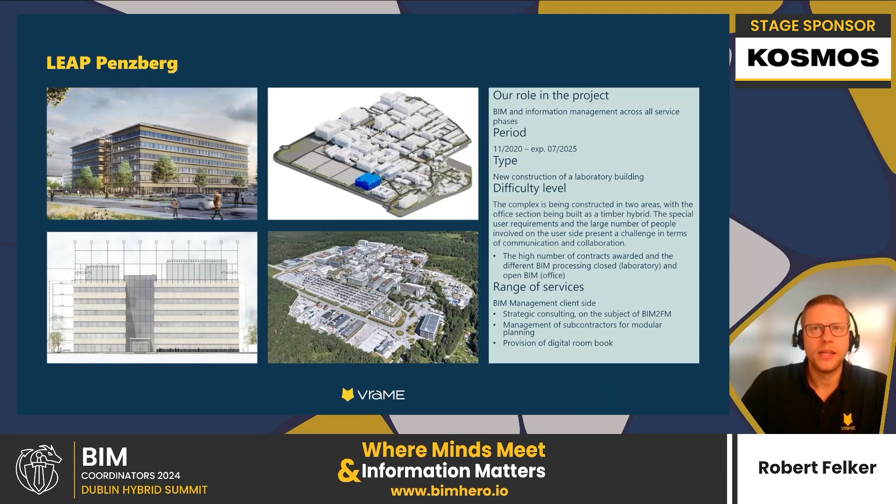The difficulty of the project was based on its structure, divided into two inside projects carried out by different work teams, each with different working methods, which we had to manage in terms of communication and collaboration with others. Let's take a look at how the project is structured and what the technical environment of the project is. So, what are the challenges?

We have a high number of stakeholders with different interests in the project. On the client side, we have the user stream and the site engineering, which provided the project to the user. In the laboratory part of the building, we have individual contracts with the planners and a high number of disciplines. The office side of the project is being constructed using a timber hybrid construction method and a specialized general contractor was sought for this proposal.

Each of these stakeholders had an individual working system with parallel project phases that overlapped and conflicted with each other, and many software that we have to make work together.

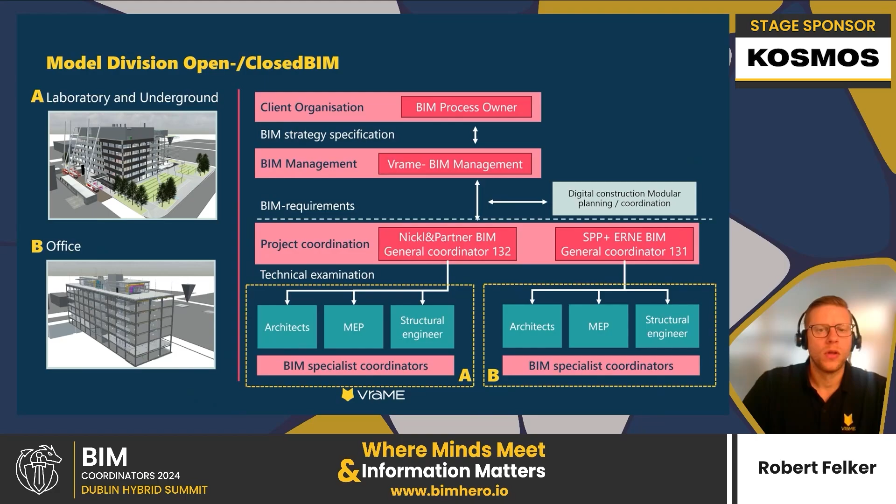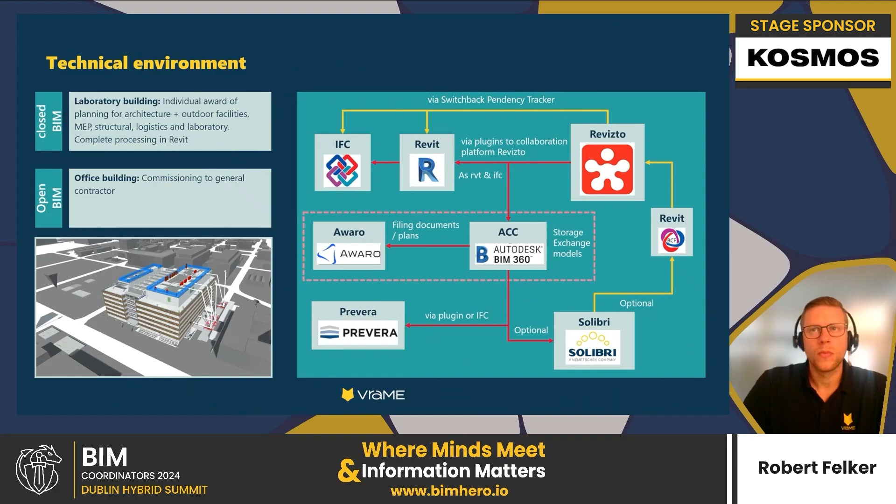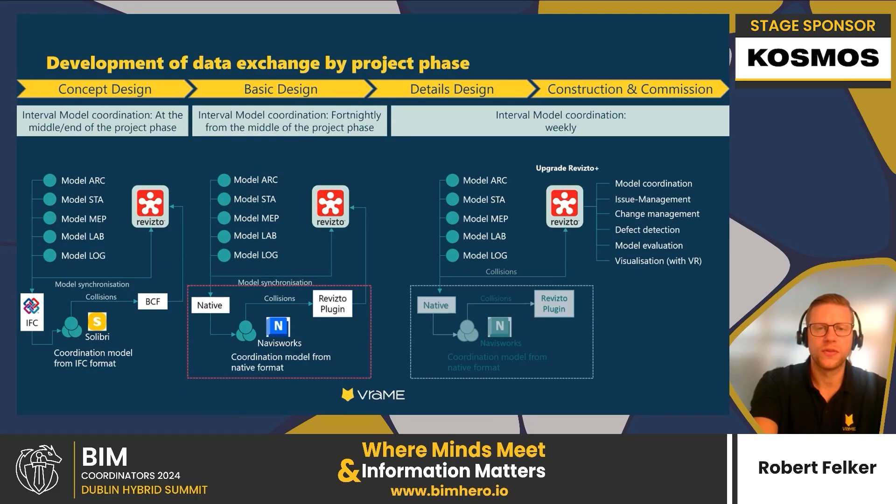So what use cases have we set up for communication and collaboration in Revizto? We have model coordination and quality assurance, structured issue management, change transmission and management, and comparison of models from detailed design and installation planning models, because we have overlapping phases, and model evaluation based on object information.

We have snagging or defect detection and documentation, so checking the deviations between model and construction site. We have the tracking process for opening voids, comparison for fire protection concepts in 2D with implementation of the models, what we will see later, and the user vote, facility management, and the safe, healthy, and environment aspects, which we have in the project.

The Revizto implementation. Okay, let's come to it. To manage the complexity of the project structure and the various applications involved, we have implemented Revizto. What we have done there is, at first, we have our complex collision matrix implemented in Revizto Plus.

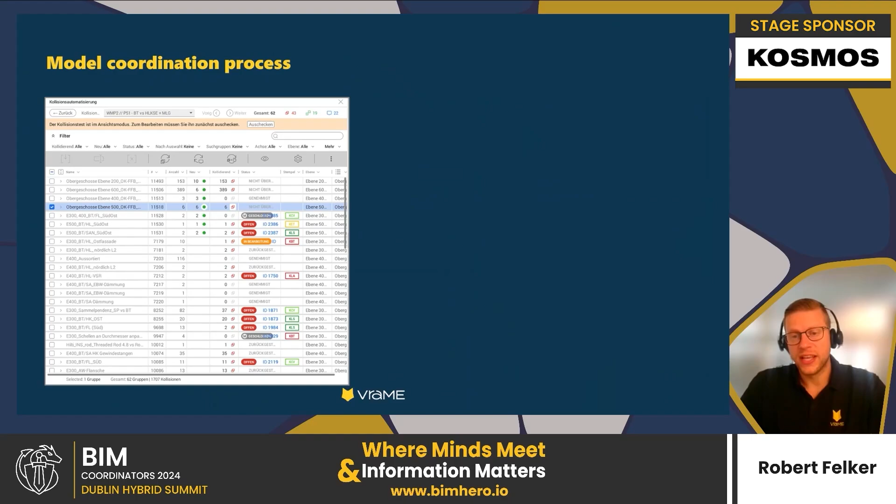Once the matrix is cleverly implemented in Revizto, further checks can be carried out extremely efficiently, including the automatic assignment of issues to the relevant parties. After each update of the review, you can quickly see how much has been processed and how many new issues have been added. Everyone has access to these collision detection results in Revizto.

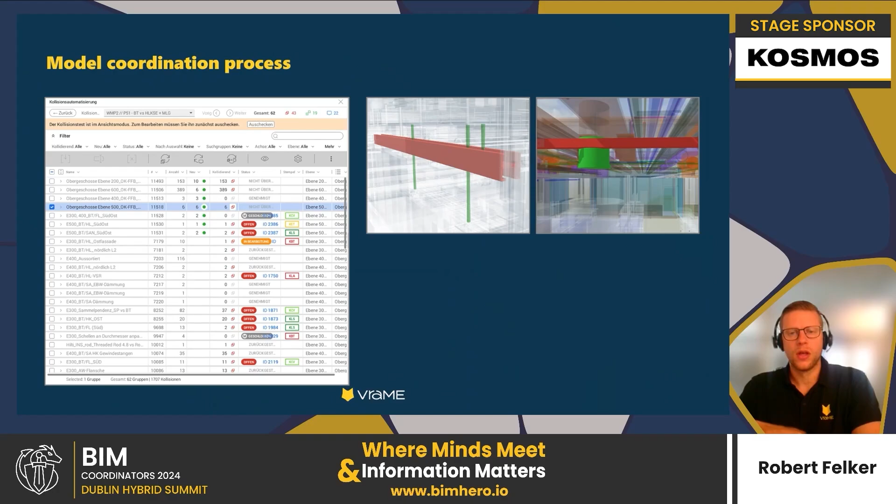Another important thing is that the editing of the rules can be restricted through permissions, so the manager can maintain this part of Revizto. Here are some examples of how the results are presented in it with the viewer.

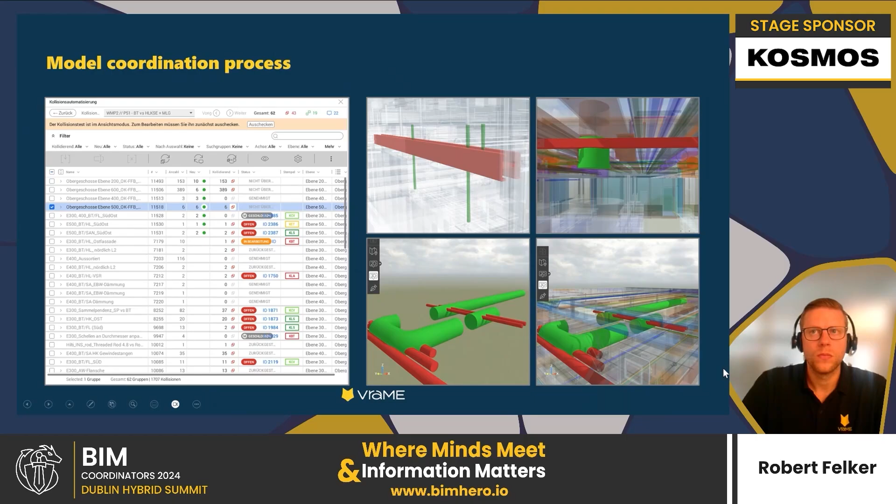After the clash detection has been performed, the results can automatically be generated as issues. In the issue tracker, issues can also be manually created, whether they arise from fly-through the model or during coordination meetings. This issue tracker allows us to manage and track all issues of the project using Revizto and its model viewer. After clicking on an issue, we can see an example of communication through BCF in the project, connected directly with the model loaded in the platform.

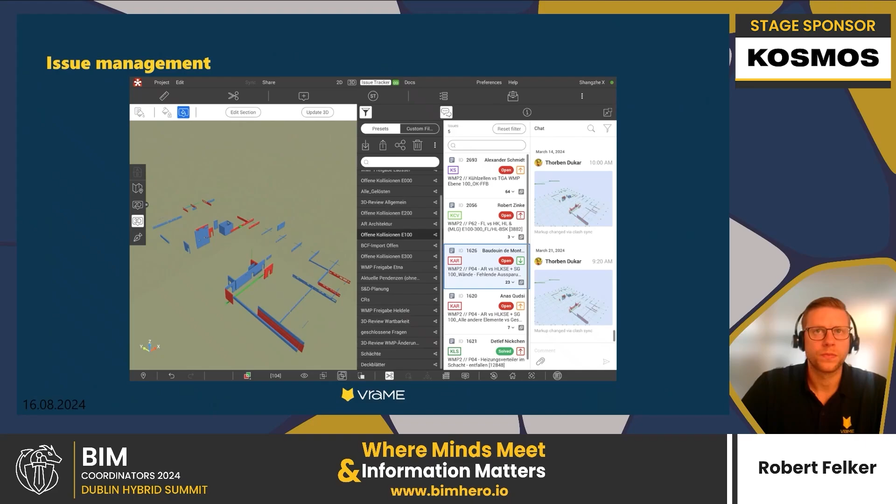An important process in this project was to track client-side changes introduced very late in the project. We have also implemented this in Revizto, as shown in the example here. Change orders or change requests are created also as an issue, and their status is recorded in the issue tracker. Only when changes have been incorporated into the model were they marked as completed.

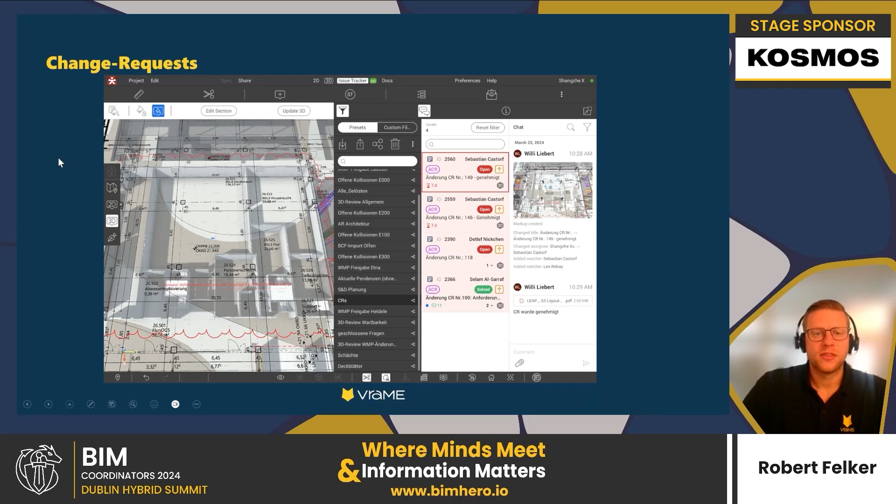Another aspect of the process is communicating changes resulting from the overlap of phases from detail design and construction, and commissioning with the contractors. We do this digitally and through the platform. It's much easier to understand what has changed, and the issues can be effectively tracked.

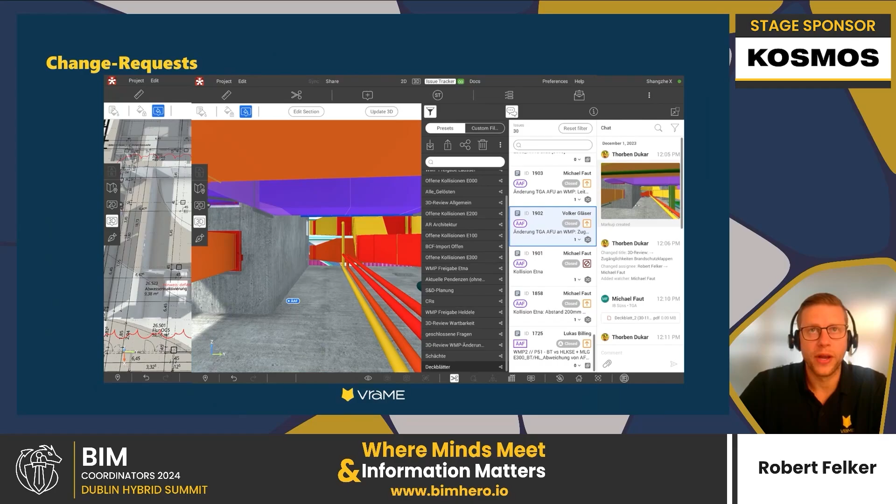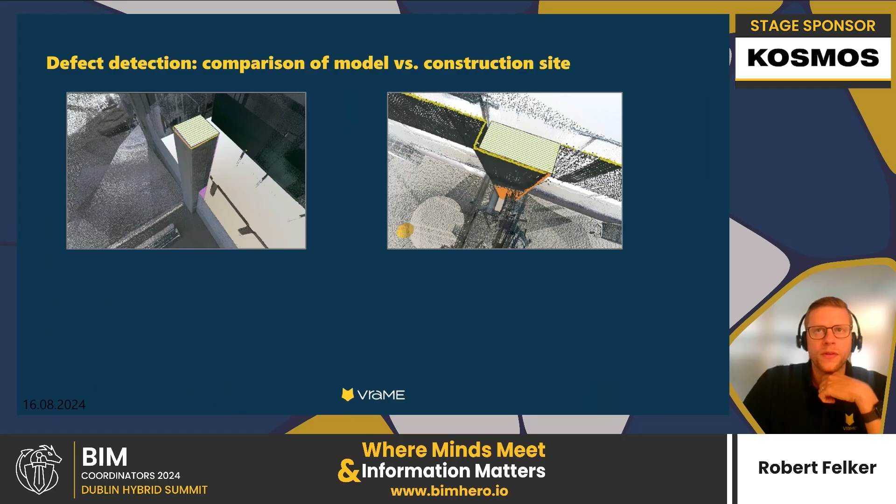Another topic implemented on the platform is comparing objects on site with the models. Deviations must be documented here, and the models have to be adjusted to get an as-built model at the end of the project. For the shell construction, this was done using point clouds, which were compared with the models. Deviations were created as issues and assigned to the relevant responsible modeler.

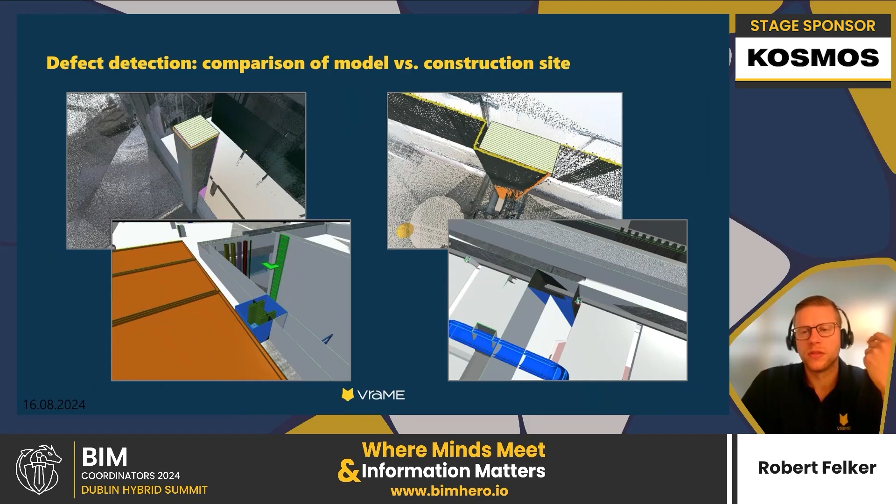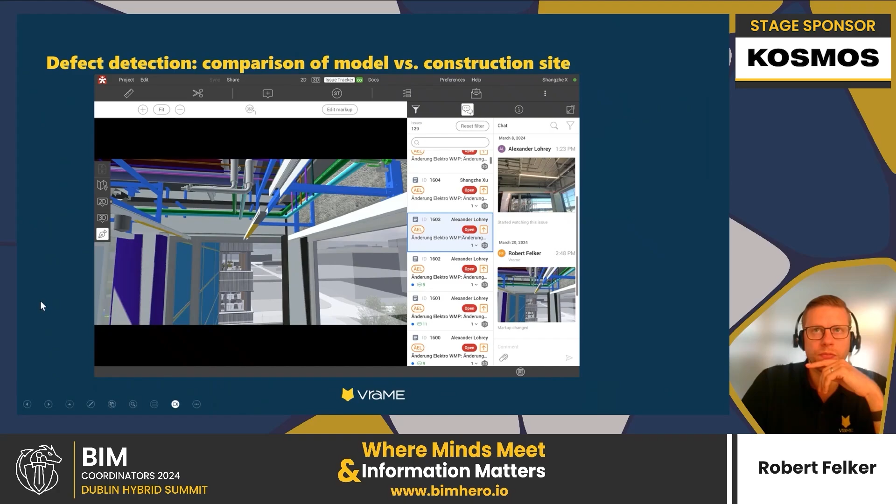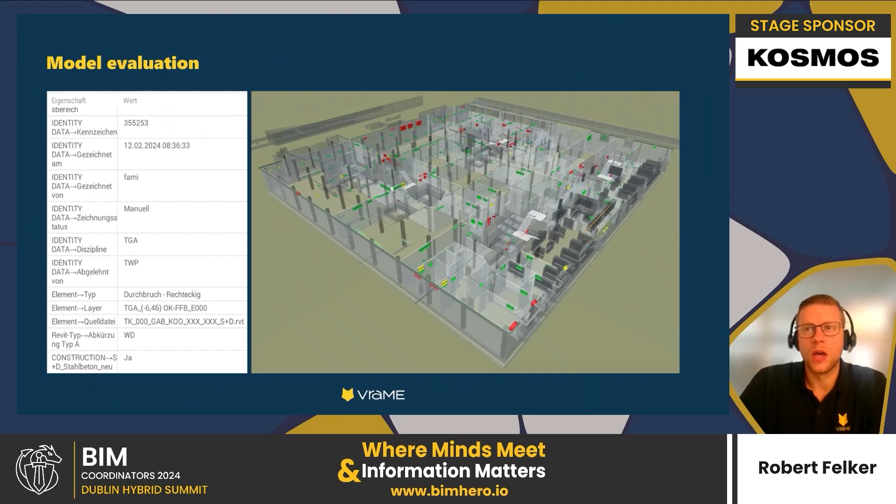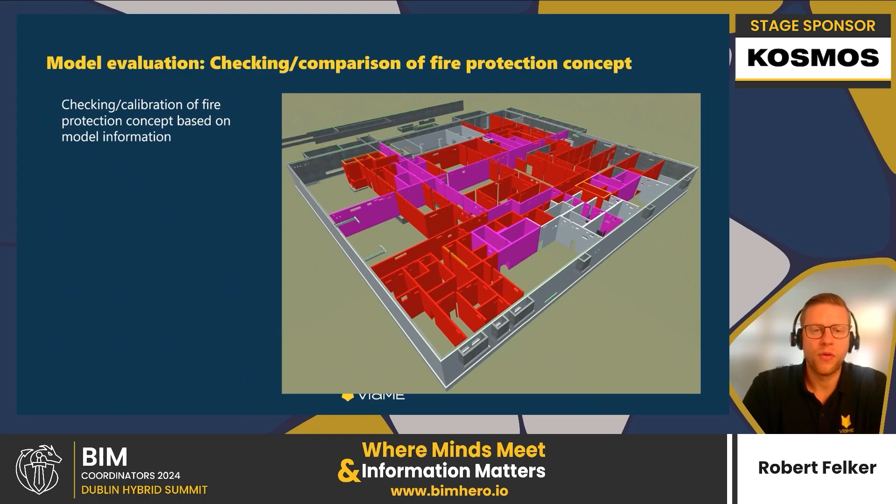Another functional analysis was to generate filters or visuals to analyze the attributes of different elements in terms of fire protection. In this project, we have a fire protection planner who does not create models, but only provides overview 2D plans. Therefore, we set up a process so that the architect transfers the information into their model.

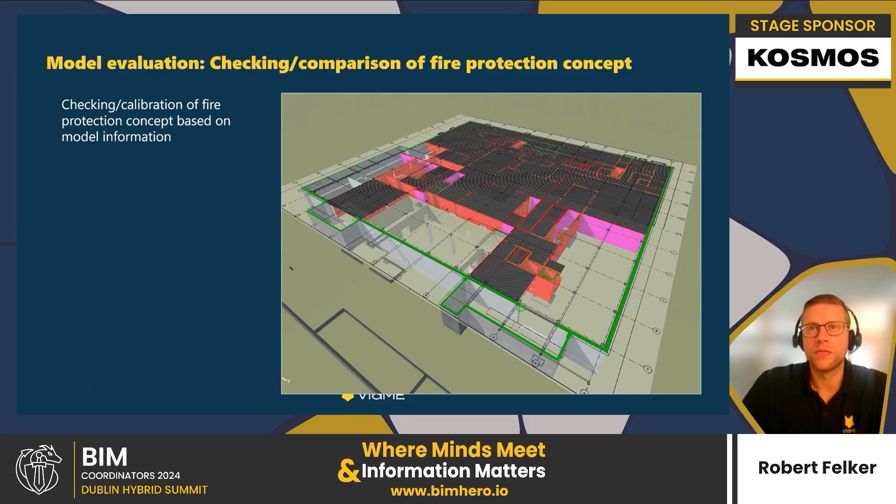You could imagine this process is prone to errors. So for quality checks, we color-coded the information in the architectural model and cross-checked it, like you can see here, with the 2D overviews provided by the fire protection planner. This also gave us great confidence during this process in the project.

In a laboratory project with even individual planners and separate contracts, the interface between laboratory planning and MEP is very important. To ensure that the requirements for laboratory equipment and the placement of connections work well, the interface between these two had to be coordinated based on the models in this case.

We discussed three different levels of implementation within the team. Level 1 is the purely geometric representation of the interface location using these small blue boxes, along with lists detailing which box contains which requirements. Level 2 has the geometrically placed boxes, but also with added parametric information within the boxes that include specific requirements. Level 3 is a bidirectional interface between the model and the equipment catalog of the laboratory setup.

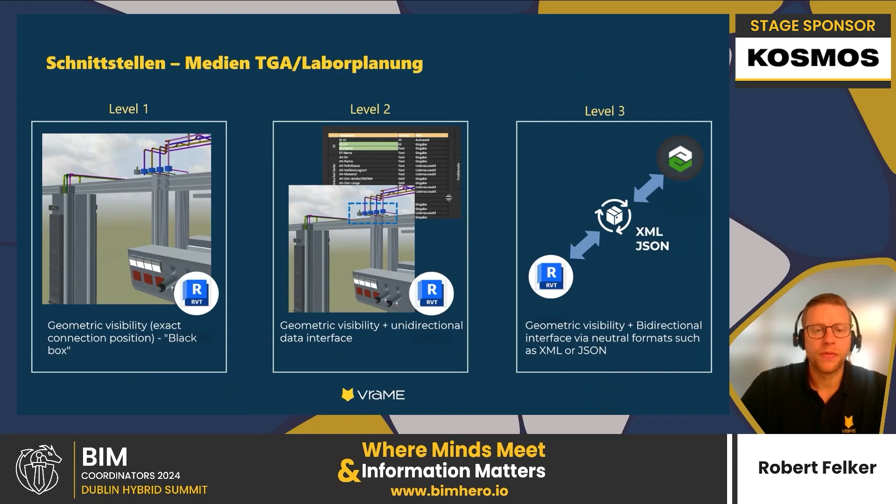At the end, the project decided to implement level 2. This means all connection points on the laboratory equipment, including requirements for service and media, were done in the model. In this slide, you can see how much information is needed for this process for each equipment at each box. You can see here the geometrical boxes, but also the information and the parameters that have been put there.

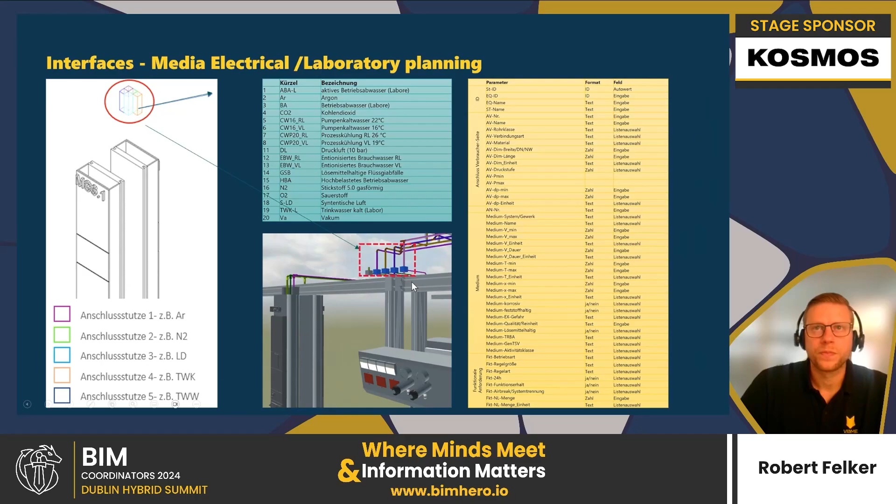Finally, we implemented VR visualization for decision making, or just to give access to the project for everyone. In the project office, there is a VR station that can be booked at any time to view the current status of the model. This is especially used by the end users of the building and those responsible for safety, health, and environmental aspects, and also facility management.